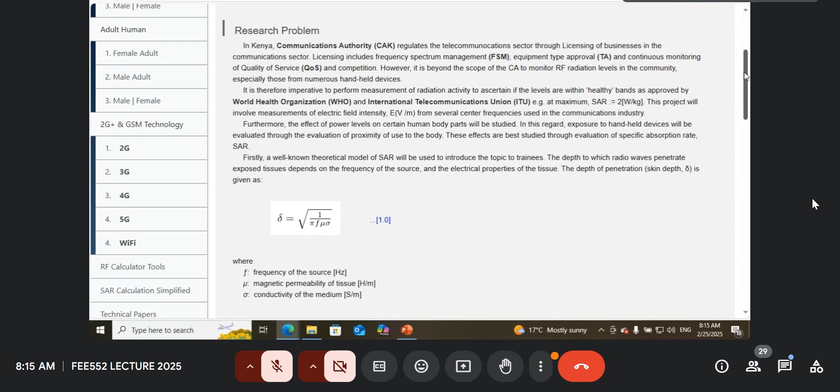So what we want to model first is governed by the ITU-T standards. ITU is the International Telecommunications Union. So there are normally recommendations for the radio sector and recommendations for the telecom sector.

So they set, including the World Health Organization, the level for the SAR, that is the specific absorption rate that should come from the RF EMF waves, and affect the amount of heat transfer that can be transferred in the environment where people are.

This is set at 2 watts per kg. So it means, depending on the source of the RF or how far it is, we need to look within the environment and see what kind of radiations we are having, the radiation intensities, which means electric field intensity or magnetic field intensity.

So if you're able to measure one of them, they are normally related to each other. You can just get the intrinsic impedance and then get either the electric field or the magnetic field. So their effect in terms of heat transfer or power should be 2 watts per kg as a maximum.

So we don't want to get into the nitty-gritties of how much does that affect somebody health-wise, because there are a lot of ongoing discussions on whether it is dangerous or not. So for us, we just take the ITU-T standard and say this is 2 watts per kilogram.

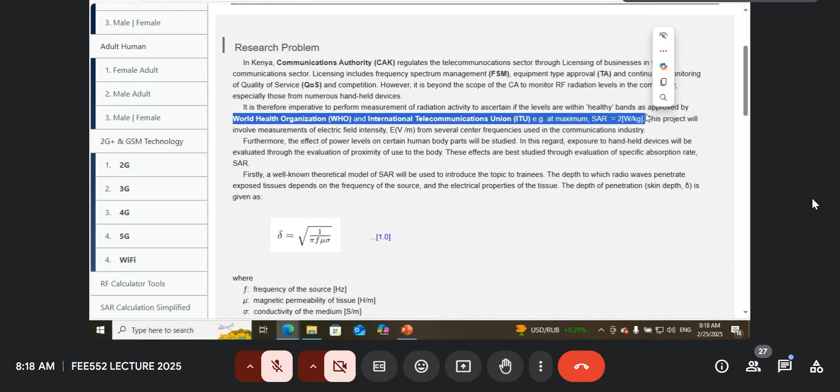And now you see you'll be having power traveling through different tissue, and they have different electrical properties like the permittivity and permeability. And what you consider is that most power travels through the skin depth only.

So you have to see how much is it, about 63% within the skin depth. So that will go through the skin depth, which means the next layer would only have 37% of that power.

So you can do that calculation among layers until you reach the brain. So it means in our case, we would have to calculate the skin depth of each layer.

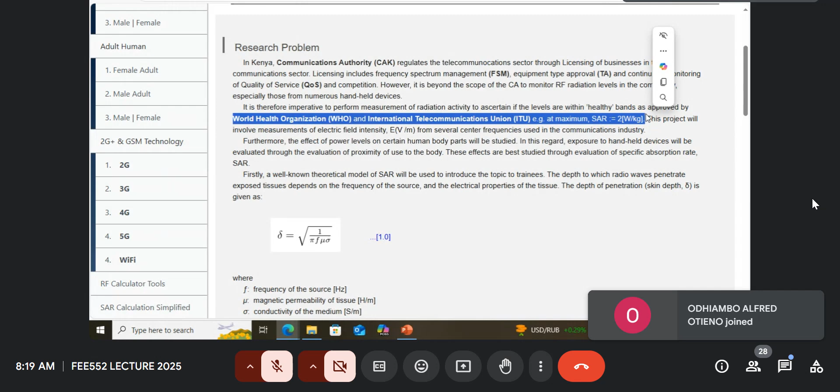So the model of the SAR - we've said SAR is the specific absorption rate. The depth to which radio waves penetrate exposed tissue depends on the frequency of the source and the electrical properties. The skin depth is normally given by the expression: delta equals 1 over pi f mu times the conductivity of that tissue. Go to that page and make your notes.

The factors to consider when carrying out such an experiment include the density of RF antennas. If you are in an urban center, you'd expect many antennas - even in the CBD you'd find several on the street and on top of buildings. So the RF environment within urban centers compared to rural, metropolitan, or educational areas would definitely vary.

Okay, some people cannot be admitted. Okay. So it will definitely vary.

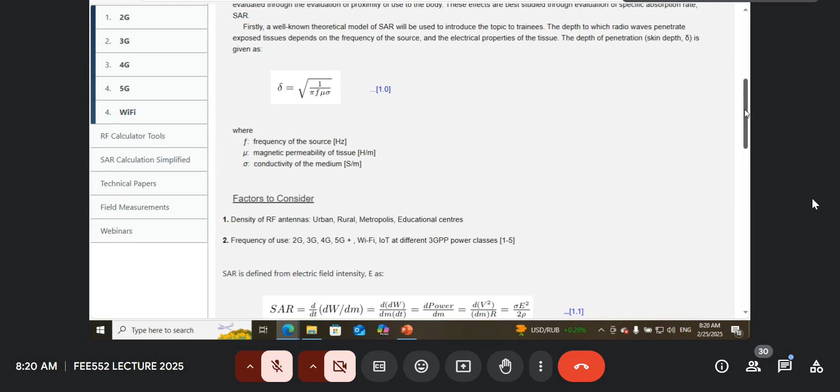Also the frequencies matter, because the skin depth depends on frequency. The higher the frequency, the smaller the skin depth on the surface. This means you'll be affected more because the heat will be concentrated within a very small layer. So the frequency of use would...

...depend on the technology being referred to. For example, 2G, 3G, 4G, 5G going forward each use certain center frequencies, as does Wi-Fi, which is on either 2.4 gig or 5 gig, and Internet of Things. Also, in 3GPP there are different power classes - you could be on 4G, but in your environment using power class 1, 2, 3, or 4 for transmission. So we have to consider what power class is being utilized, because what's important is that the RF in the environment also depends on the EIRP, the effective radiated power from the transmitter. We'll see how it's related to that.

So these are key factors to consider when modeling the RF environment. So how do we define SAR?

Specific absorption rate is the rate at which energy is changing per tissue mass. So you have d over dt of dW over dm, where W is energy and m is mass. This gives d over dt of dW over dm dt. You can see dW over dt is actually power over dm. So it means we just need to compute power here.

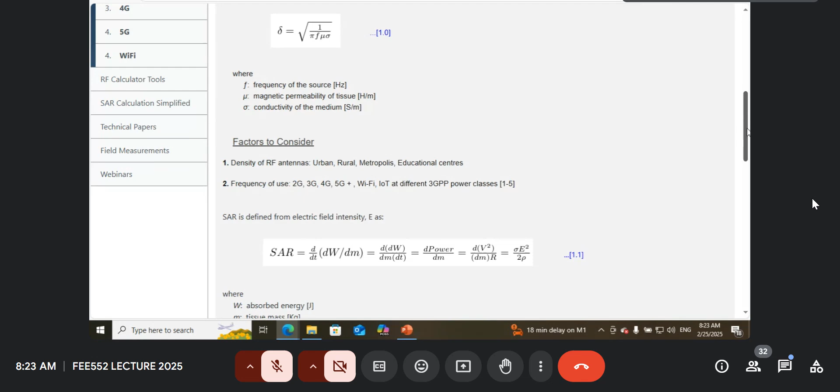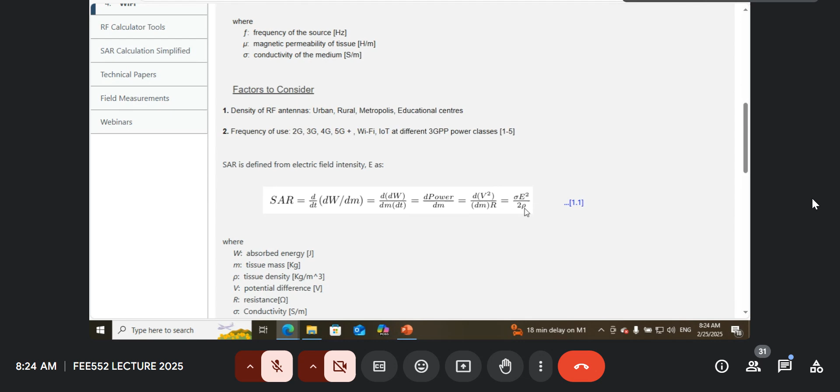Then you have the mass, which gives an area in the bottom part, and then a volume - mass over R cubed gives you the density. So you can express SAR in terms of conductivity times the electric field intensity squared, over 2 times rho. That 2 is there because you cannot calculate it directly from V squared over R - it just means the RMS value. We're taking the effective value of the power, the RMS value that we're computing, that's why we divide by 2.

So this is the measurement you can have physically. E is easy to measure using equipment. If you have the tissue you're considering, and you can get the conductivity and density of that tissue, then all you need to measure from equation 1.1 is the electric field intensity. If you get the electric field intensity and know the tissue density and conductivity, then you can compute the SAR.

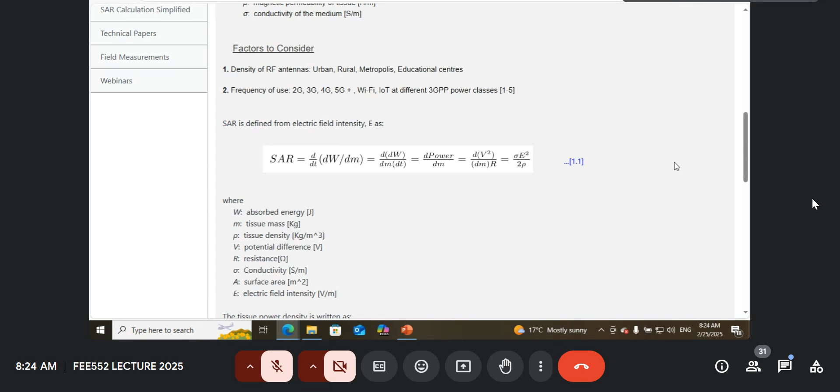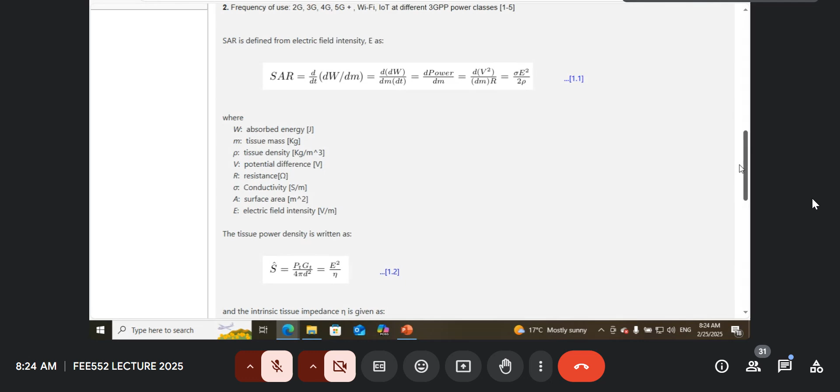Okay, so W is the absorbed energy, M is the tissue mass, tissue density is rho, potential difference V, resistance, and then conductivity and surface area, electric field intensity.

Now, the tissue power density is the radiated power, which depends on what you are transmitting times the gain of that antenna. So you have PT times GT over the surface area. Remember, you're now considering as if the antenna was isotropic, so that's the area of the sphere around that antenna. Assume my isotropic antenna.

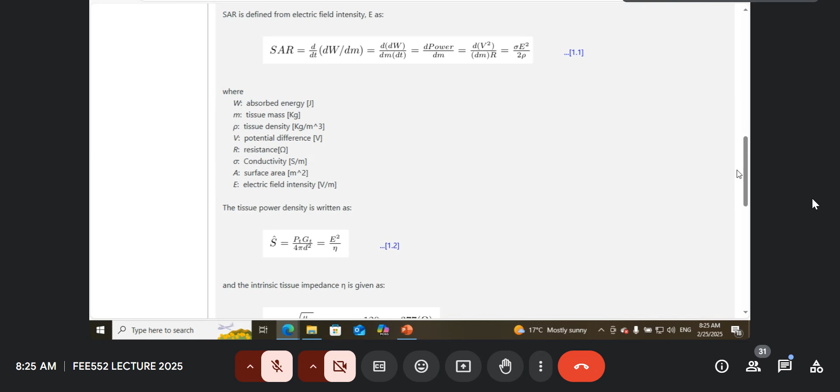So the power density is P, the transmitted power times the gain of that antenna over the area, 4 pi d squared. And that can be related because the power density is equal to the electric field intensity squared over eta, just as we did in equation 1.1. So you get E squared over eta.

Now eta is the intrinsic impedance of that tissue again, so that's where the electrical properties come in. Eta is the root of mu r over epsilon r times eta naught. Eta naught we know is 120 pi, which is 377. So depending on the tissue, if you know the tissue properties, you can calculate the eta there.

So you have PT, the transmitted power, and gain at the transmitter. Now D here is the distance when you're considering the power density. D is the distance from the antenna to the tissue, but now it includes the depth of penetration.

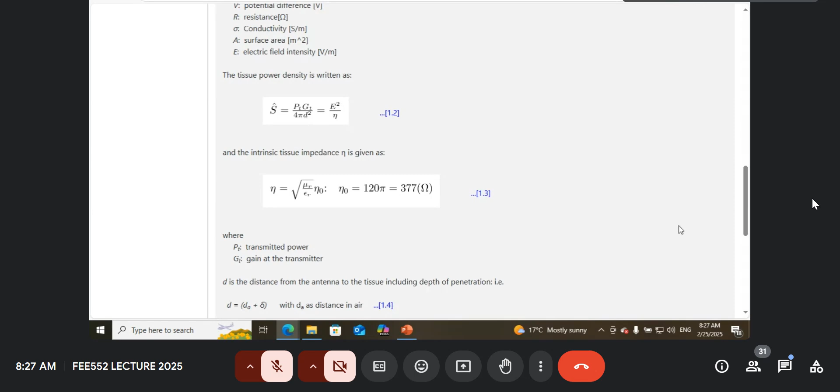What that means is the distance in which you are calculating the surface area is from the antenna. So it's the distance in air, and then let's say you are considering the skin. At the point at which you are considering, that would mean we are considering this at the skin depth. So it will be the distance in air plus the depth in your tissue. That would be dA plus delta, where delta is the skin depth. So D equals dA plus delta, with dA as the distance in air.

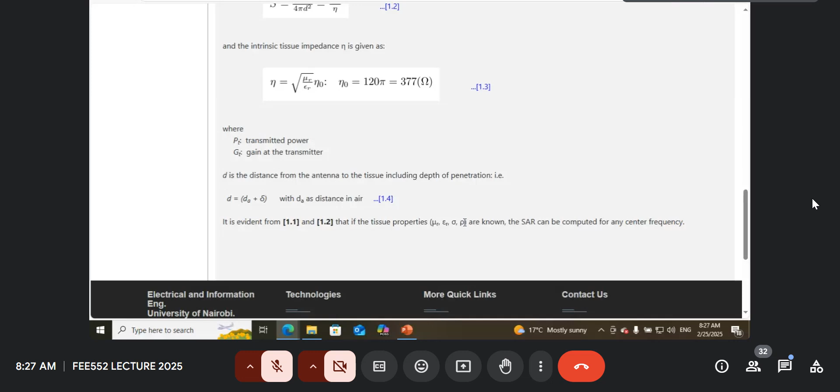Okay, so all the tissue properties that you need are the permeability, relative permeability, the permittivity, conductivity, and then you calculate the tissue density, meaning you know the mass over the volume. These values are constants, known from databases. So if you can get mu r, epsilon r, conductivity sigma, and rho, then you can compute the SAR at any given frequency of your choice.

All right, so if you're able to derive this and show the equation for the tissue density, somebody tried to do something, I don't know.

All right, so if you get the equation for the SAR, then you should be able to manipulate it for any work to do with the SAR, whatever it is that is asked about SAR depending on the tissue. So if I asked you to calculate the SAR in the meat layer after the skin layer, what would happen is that at the skin depth of the skin tissue, you'd have like 63% of power confined within that skin depth.

So it means then the power that would be transmitted towards the meat layer, let's say you don't have a fat layer, would be just 37% of whatever was at the surface of the skin, because the rest is going through the skin depth of the skin layer. So 37% would proceed towards the meat layer.

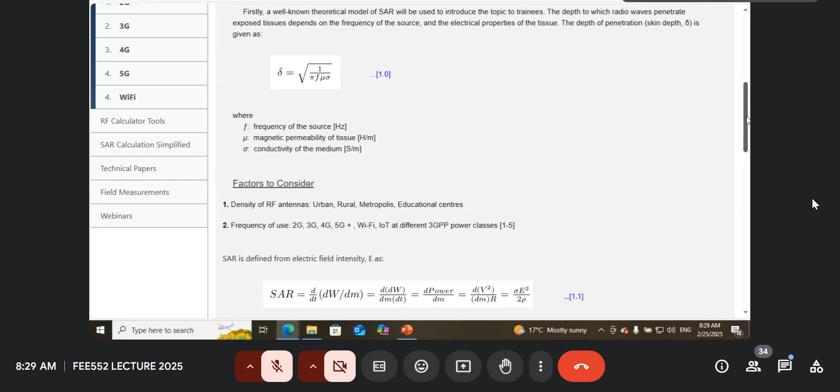And if you want to look at some of these papers that were done by students before, we can see what they did in paper 1. I hope it's going to open here - seemingly the Wi-Fi is not very strong.

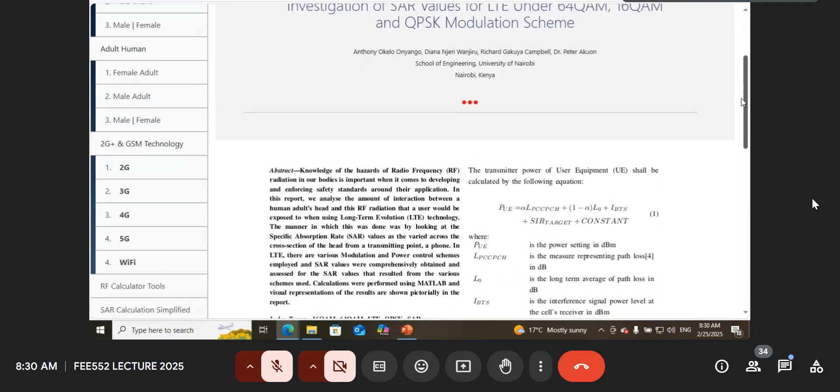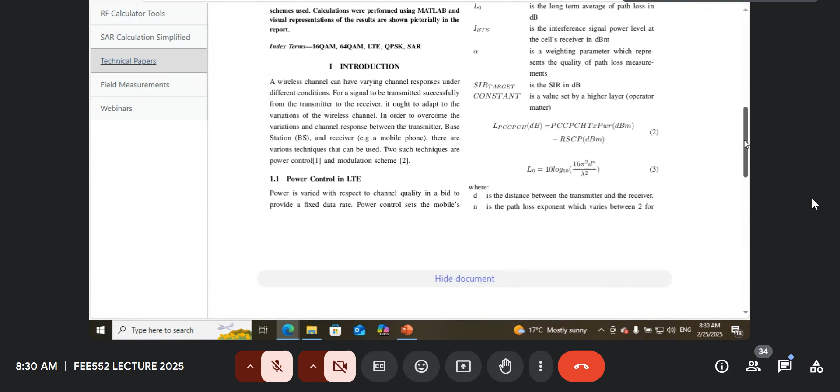So here they were investigating the SAR values for LTE, that is 4G, under different modulation schemes - 64 QAM, 16 QAM, and 4 QAM. Now these modulation schemes, it depends - you need to check the power, transmitted power, the gain of the antennas used, and also the power class. So if you read this paper, you should be able to see more on how the students analyzed the SAR.

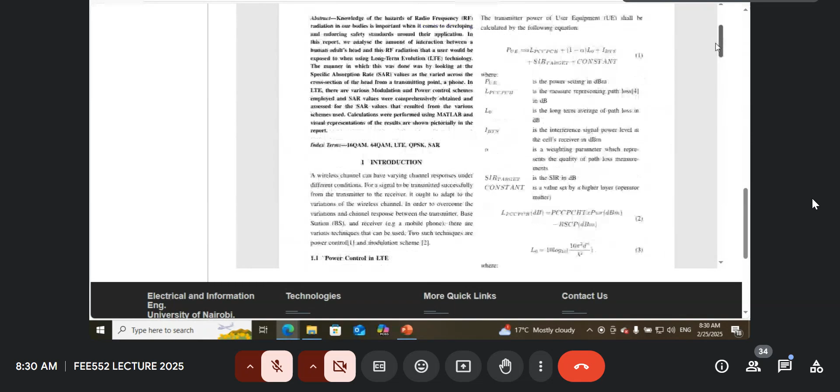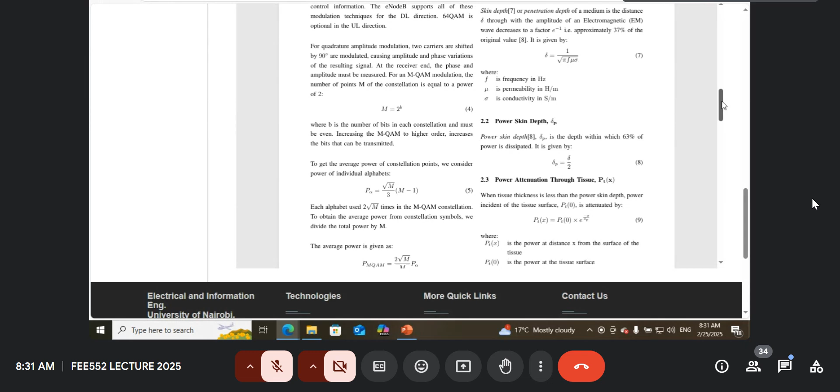Of course, power skin depth is the depth within which 63% of the power is dissipated, so that would be half of the normal skin depth. The skin depth in equation 7, if you're considering power skin depth, it will be that divided by 2 because of the power attenuation of equation 9. You can see that.

So the transmitted power, they're able to calculate that based on those equations. The SAR can be changed to equation 11. Don't worry about that for now.

So there they did for 16 QAM. Power, you can see on equation 16, for the user equipment, the power used for transmission is 4 milliwatts for 64 QAM, 0.25 milliwatts, and for QPSK, 0.01 milliwatts.

So it means if you get the tissue properties in a table like this one, you can see the relative permittivity for the skin. This is well known, so you can get this from databases. Let's look at a few of the parameters.

So tissue properties are actually at different frequencies. So at 1.8 gigahertz, you can see they're quoting reference 10. We'll see what reference 10 is. So the skin relative permittivity is 38.9. Conductivity is 1.25.

Density of skin is 1010. Thickness is 0.001. And the power delta, the power depth, that's just half of that, which is 0.0053.

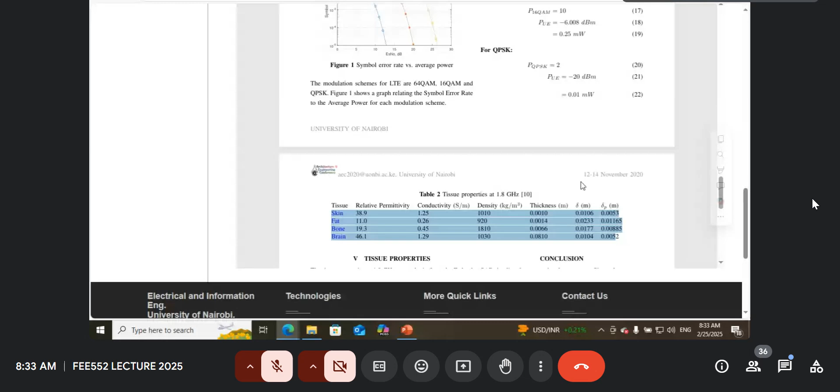So using those properties, you should be able to calculate the SAR in theory. So they were able to do the SAR profile. You can see figure 2. You can actually go to that website and see paper 1 if it's not very clear on my side. So you can see the SAR values.

What I can see here for the 64 QAM, there's a value there for the skin. Because of those tissue properties, you can see the skin is high, the value is high. But when it goes to the fat layer, it drops. It climbs a bit for the bone layer. And then it climbs for the brain because of high permittivity in the brain.

But at the center of the brain, you also consider why this is coming low. Because this is really far from the surface of the skin—not the skin depth, but how far the power is coming.

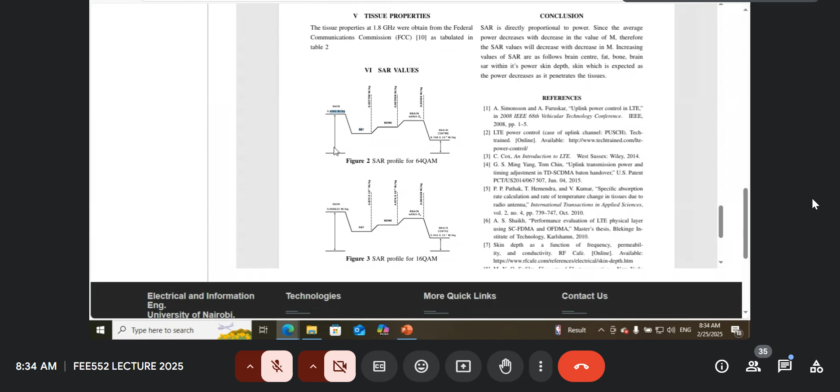And here also we are considering, they have to tell us when calculating the SAR, how far is the antenna? So if they are calculating it from a 4G phone, then they need to tell us, or you need to tell us, how far is that.

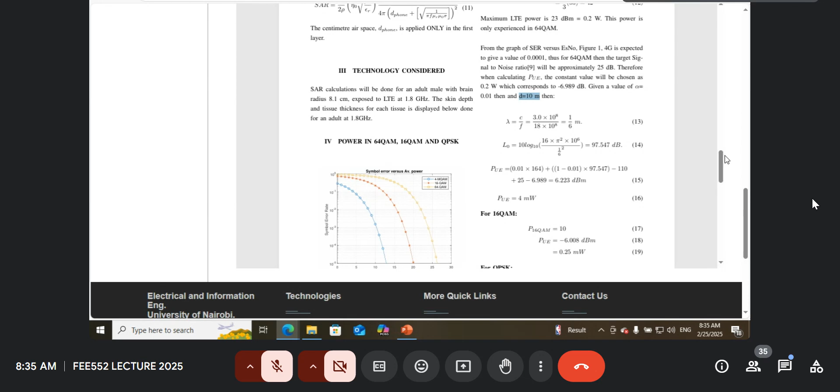You can see D here is 10. How far is the user equipment from your skin? They must have specified it somewhere. The constant value chosen corresponds to that, given a value, and D is equal to 10 meters. So probably the antenna is 10 meters away, because that will affect things—if you look at the SAR calculation in equation 11, you see the distance here, D phone.

Centimeter airspace D phone is applied only in the first layer. Yeah, that's correct. So how far is the phone from your skin? That is very important, so it will help you calculate the SAR correctly. So if you move it away from your skin, definitely you have a lower value of SAR. If you move it very close, a higher value.

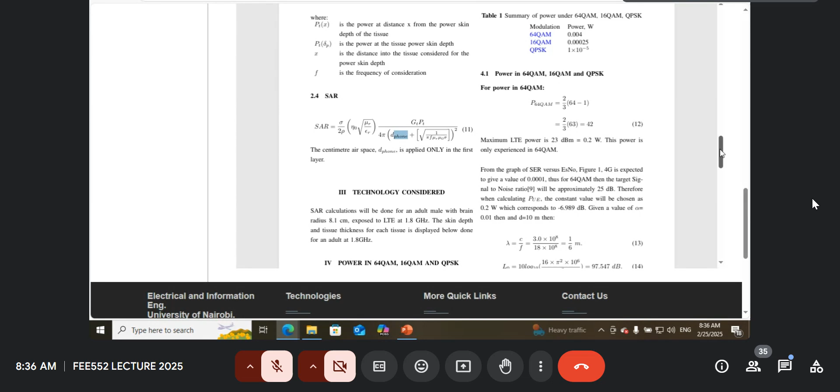You can even put zero distance, like the way you put your phone on your ear. So it means there's zero distance, so D phone will be 0, so you only have the skin depth. So again, you calculate the SAR, you realize it's the highest. All right, so that's one way of investigating the SAR values.

There are many other ways. I'm sure you can read the other papers. They're simple to understand, so just go through them and see what your fellows did. Very good job that they did.

Then we can have a look at an example. We try to put a calculator there so that anyone, not necessarily an engineer, may just want to check using the home equipment or home devices that you have, to see how dangerous they could be based on ITU-R standards or World Health Organization standards.

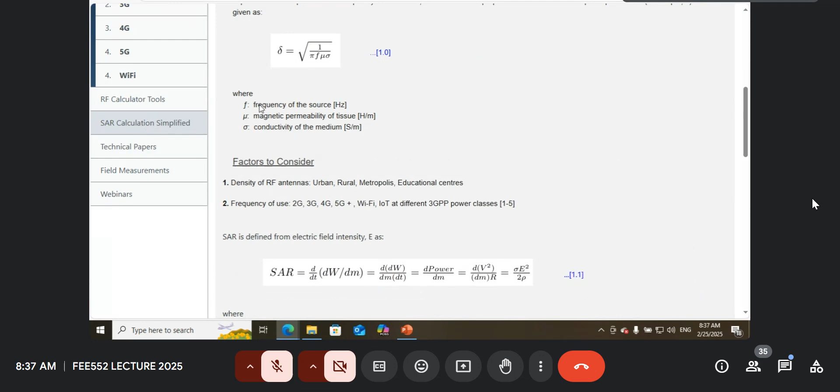So in that case, you can come here, go to the SAR calculation simplified, and determine—because now we have seen that it depends on the distance of this tissue from the radiation source, the RF-EMF radiation source.

So then that means we need to study how it affects an adult, because we know the size of the head of an adult compared to an infant will be different. And we also check, on average, does it affect ladies more or men more? So those are some of the ways in which you do research.

So you can come to the simplified calculator, and choose whichever technology you want to test. You could have a microwave oven at home, Bluetooth device on your laptop, a Wi-Fi access point, 5G antenna, 4G, 3G, 2G, or GSM 1800. That is the BTS, or GSM 800, 900, also a BTS, a different standard. You could have both 800, 900 and 1800, 1900 on the same sector of a BTS if you're doing co-location of antennas. So for example, let's choose...

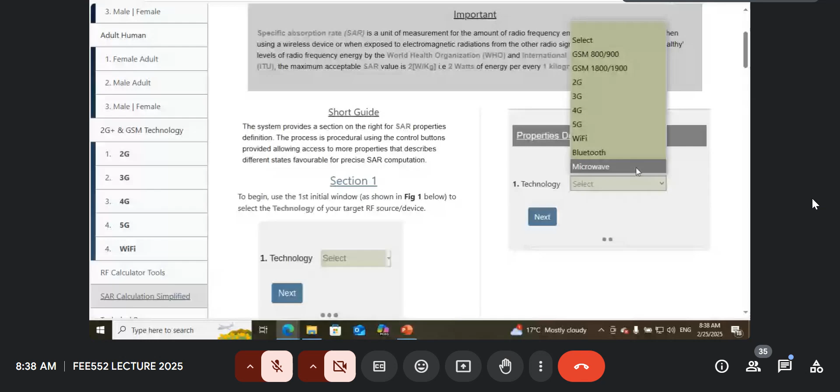Maybe somebody just at home wants to check. He has a 3G or 4G phone, he's not an engineer, but able to understand this calculator. So you just choose you want to check a microwave oven. So that's the technology, it's a microwave. And that's the frequency that determines that.

If it's not in the list, you select others. So we go back. Technology is microwave, so it means here we have to choose either others or microwave oven.

You want to test it. Most of the concerns we got before we started this project was somebody complaining, wanting to know whether she needs to put a Wi-Fi access point in a bedroom, as people do, or in the sitting room. How much does it affect a child? So then we said, okay, let's see whether there will be a difference between an infant and an adult.

And then later she said, my child is a girl, not female, it's a female, not a male. So again we had to check between male and female, what will be the difference. So these are the concerns of the users or the public, so you have to look at that.

So my source is oven, and the RF source, the age set, let's say infant, and the infant, let's say female. Then we go next. How old is the child? So age for infant will give you 0 to 36 months.

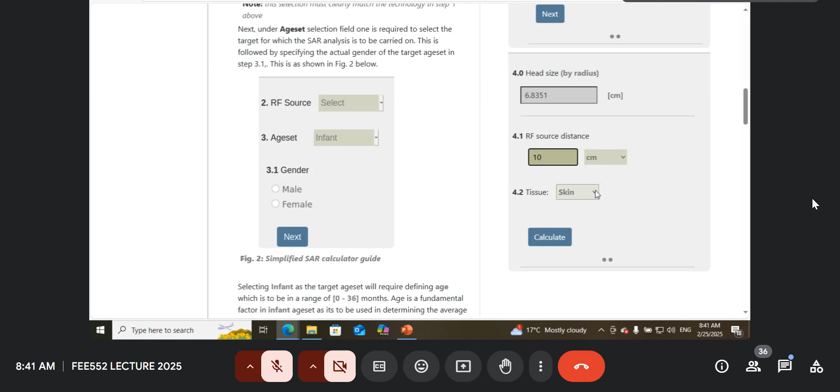So you calculate, you can see the SAR result is 1.36, very close to the limit, which is 2 watts per kg. Let's change that, what if you move closer? 5 centimeters, you get 13. Very dangerous, yeah, but you see also how quickly it degenerates.

7 centimeters away from the oven, 4.6. At 8, 2.9. What about 9? So those are dangerous levels. 1.9 also almost dangerous because that's just near the limit. So you can see that, then you can now check your details there.